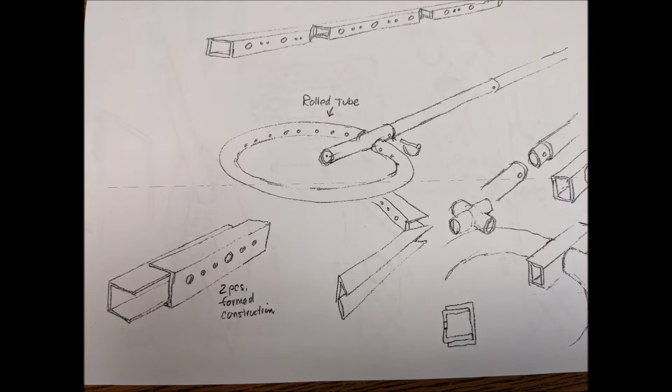This video will walk you through the whole process of designing, building, and manufacturing the EcoBurn. We started with sketches, some initial sketches for a tool to put into the fire to make it burn cleaner and easier, so there's really no smoke. We went through a lot of different evolutions until we came up with a final product, tested it, then did all of our CAD drawings.

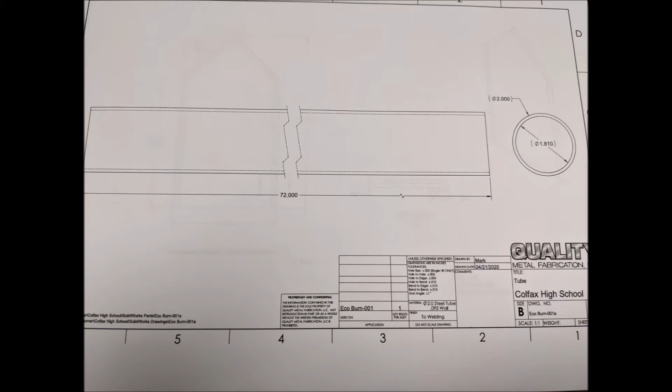These drawings are the parts of our EcoBurn. Once we had our CAD drawings figured out, we started working with a manufacturer to figure out how to design for manufacturability. We came up with a great product, a great system.

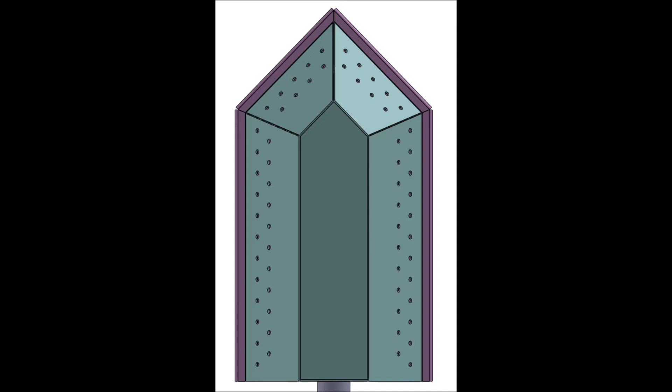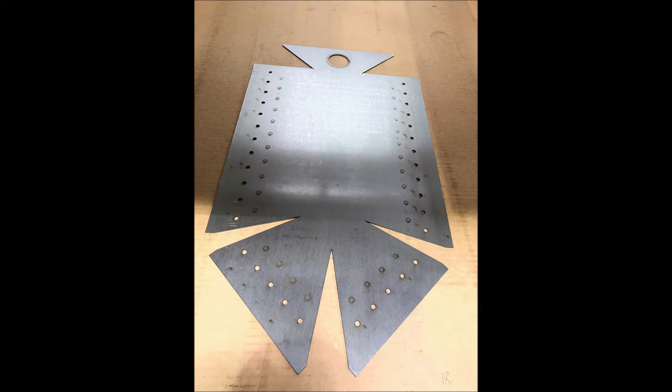After we had all of our supporters together and the Kickstarter campaign was successful, we went to manufacturing. The first thing that happened was we used a laser cutter to cut out the top part of the box. You can see it here, how it lays flat.

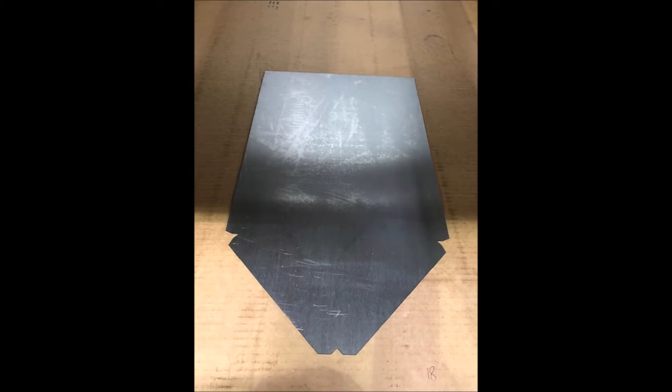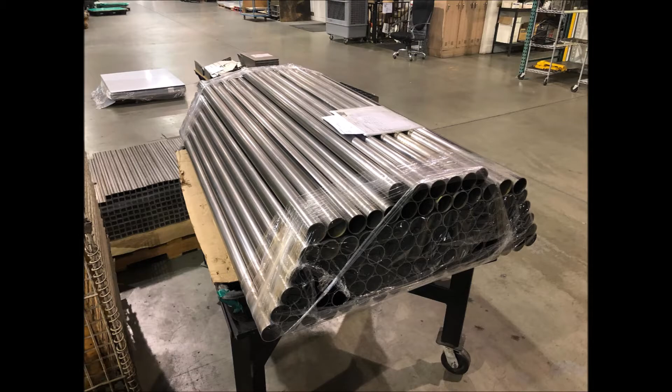This is all Quality Metal Fabrication, handmade in a really cool shop right here in our area in the foothills. There's the bottom piece and then the pipe, so there are three parts to this product, and they get assembled at Quality Metal Fabrication. Once all the parts were cut out, the next step was assembling them.

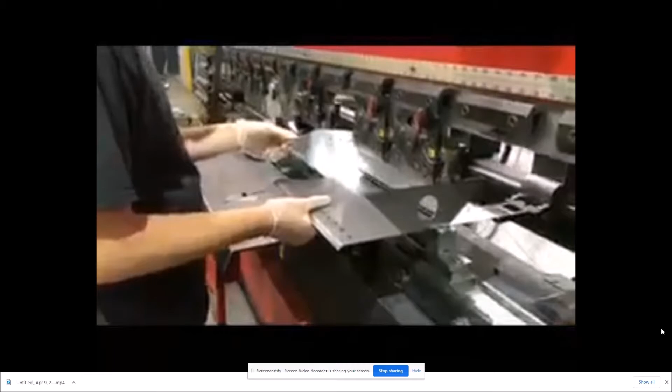All three parts are manufactured, then over to the brake to take the top hood part and bend it. This is all quality metal fabrication. They're doing a beautiful job here, really working with us and doing such high quality work.

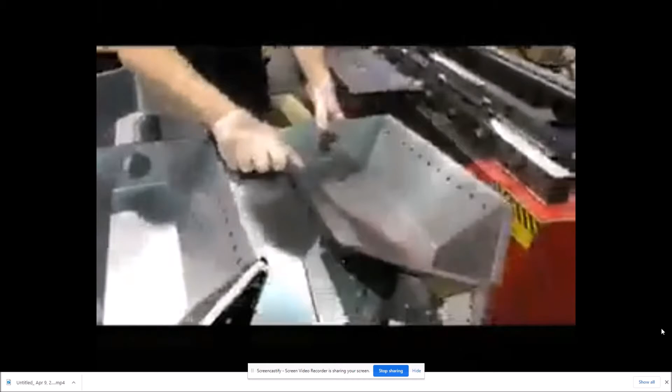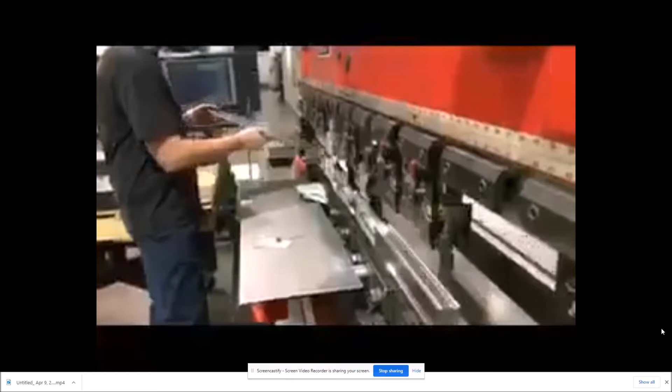That's the hood part on the EcoBurn. It was laser cut, over 100 units laser cut, then the bottom piece, and then all of the pipes. So all of our parts are put together.

From there, the metal gets bent through a metal brake to get them perfect. Setup is pretty time consuming and complicated, but once you start operating the brake you get in a rhythm and it gets a little easier.

It's cool, these things are all handmade right here in the US, right in our own neighborhood. Just such a pleasure to work with Quality Metal Fabrication.

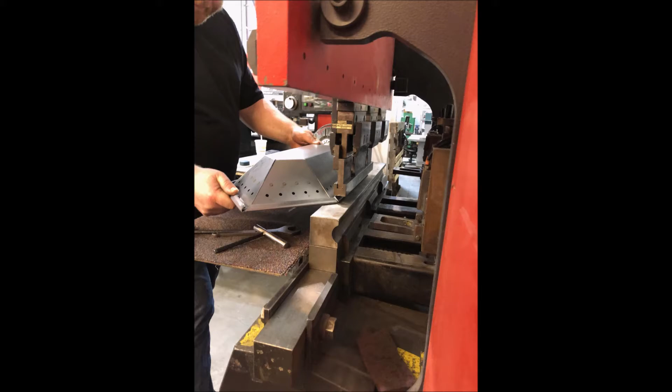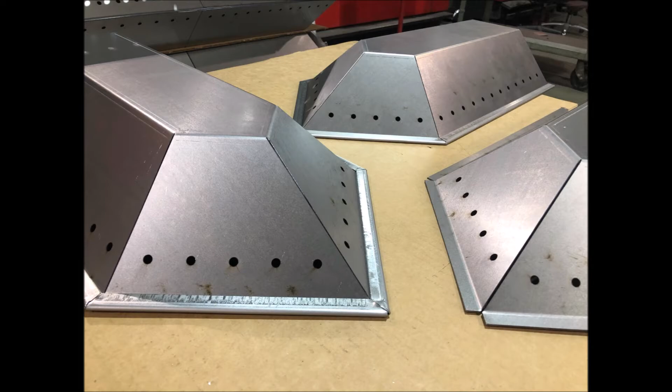After these hoods were all bent to shape, the bottom piece went in there and got pressed together, so the hem was on the bottom sheet. That hem got bent over the top of the hood, and then you can see them here, tack welded a little bit to hold that bottom sheet in place.

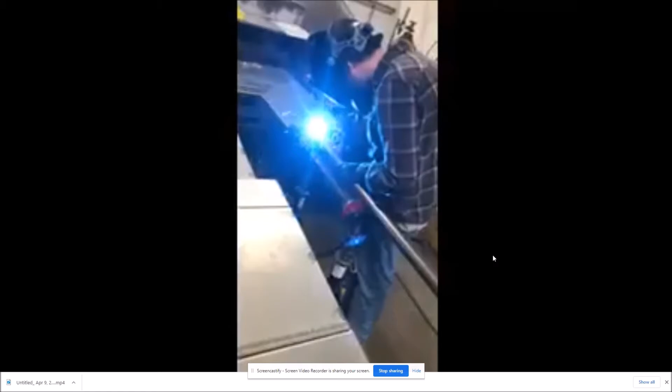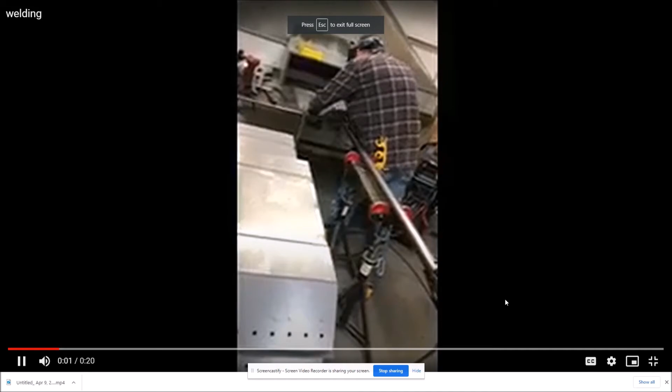Once the whole head of the unit was done, it went over to welding, where they welded the pipe into the hole inside the hood, and also tack welded around the head of the device. You can see that happening here. A little bit of low quality video, sorry for that.

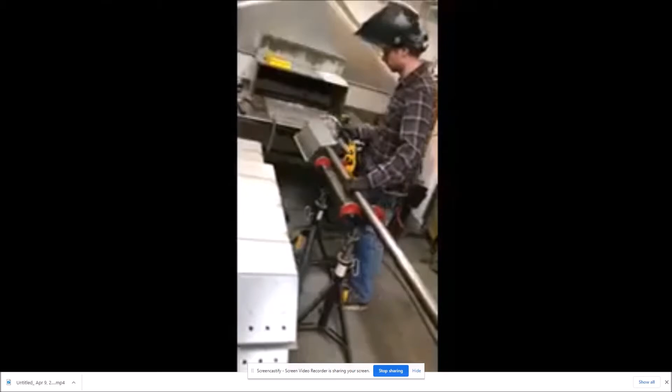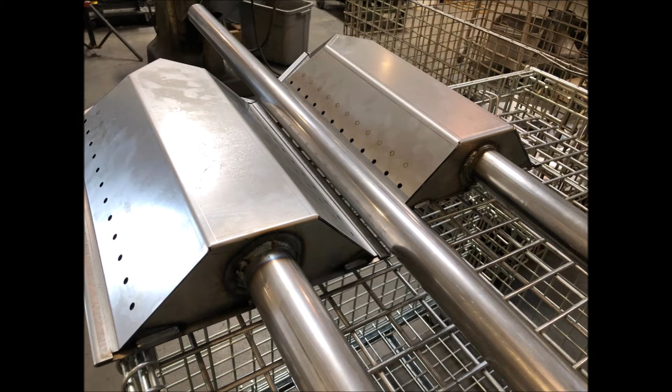I wasn't actually able to go in and video. The owner sent me these videos, so I really appreciate him doing that, but that's why the quality isn't quite the same. And then there they are, all put together, organizing and shipping, starting to package them, palletize them.

Letting them cool, they came out absolutely beautifully. You can see them here with that bottom sheet, the top hood, and then the pipe welded in there. And then there's a whole pallet of them right before shipping.

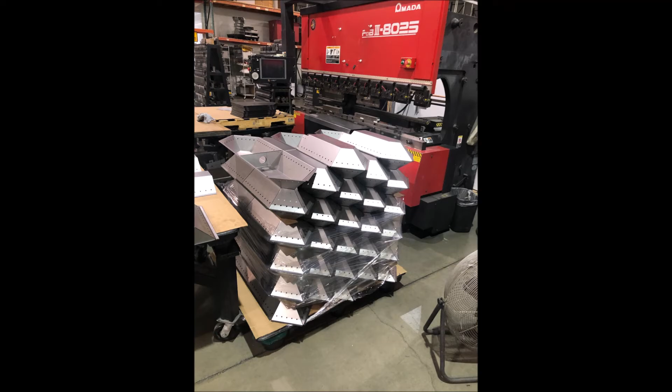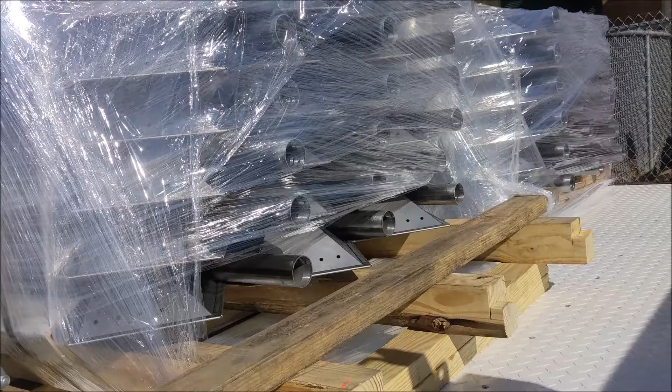All right, here we are, big day at Colfax High, Quality Metal here delivering our EcoBurns, looking absolutely beautiful. 36 per pallet, got two pallets right here. We'll see if we get the mini skid steer on them.

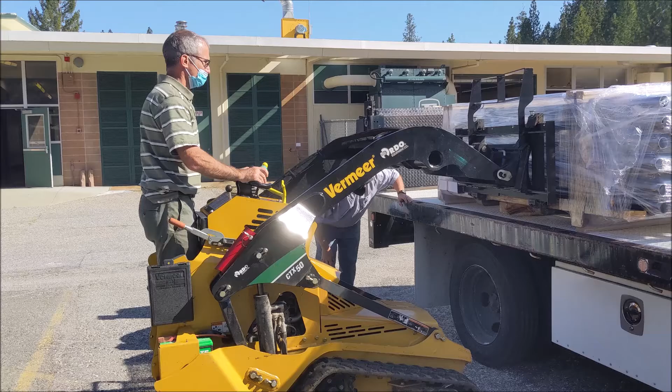Unload them, get them out to our supporters. Very exciting, unloading them with a mini skid steer right here with a set of forks on it. I think they're probably about 10 pounds a piece, so the pallet's probably only about 400 pounds.

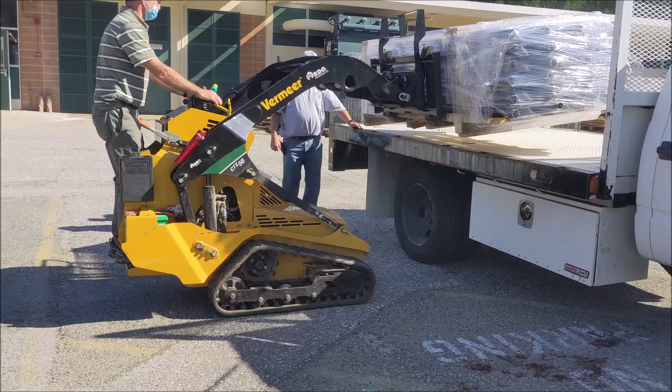I can't tell you what an absolutely incredible project this was. Students really generated the ideas, they really kind of ran this whole show. Mr. Kinsey and myself were really just there to support the students.

It was a fantastic project, and actually seeing it go to market via Kickstarter is just really a testament to the community we live in and how supportive everybody is. So really great project, they're here, ready to go.

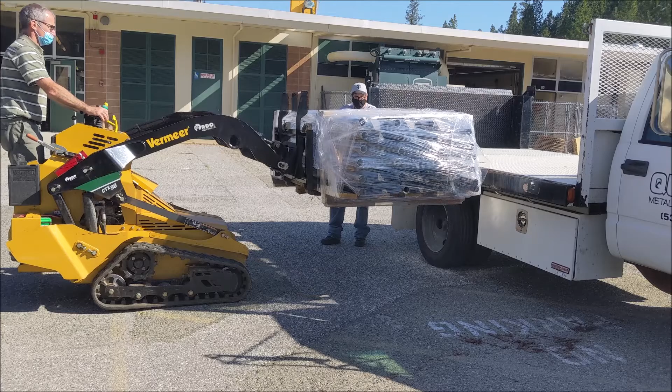A couple key safety features with them. Never use this tool without checking with your local fire district first. Secondly, only use it to start the fire. We put an additional little hole at the end of the pipe so you could use a steel rake to pull it out of the burn pile. It's only used to get the burn pile started; otherwise that burn pile will heat up too much and end up melting the whole EcoBurn.

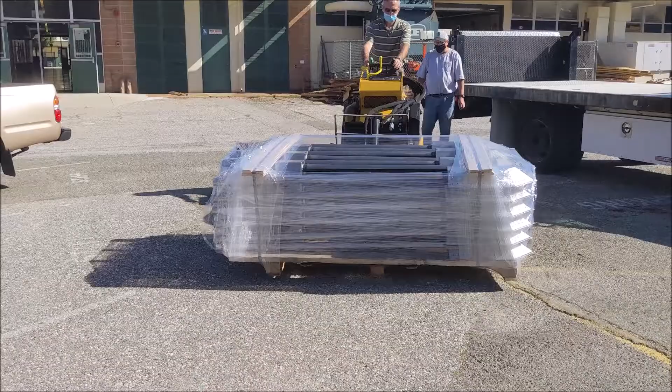But they're here, ready for you to come pick up. And I want to just thank you all for your tremendous support. Absolutely beautiful, look at those.

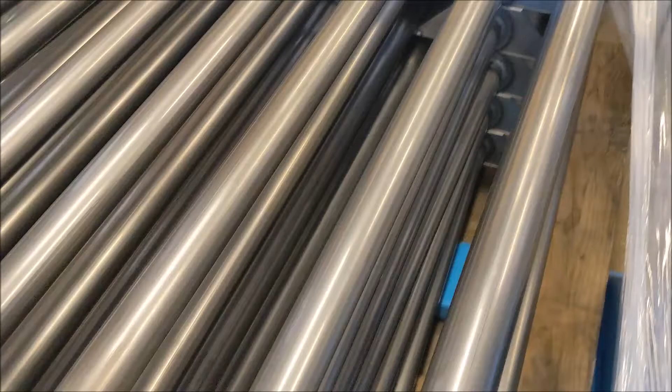Look at that, beautiful welds. EcoBurns got that additional hole at the end so you can pull it out with the steel rake. Just hook it in there and pull it out.

There are two pallets right there. Patented product invented by high school students, marketed by high school students, manufactured and distributed all right here at the high school. Pretty exciting.